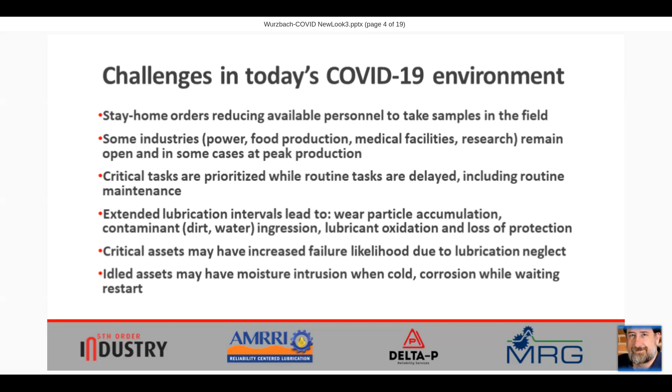We might see corrosion taking place while these components are awaiting restart. We may have components that in the past, while idled, would be cycled or manually rotated, or have lubricant added to them. Because of prioritization of tasks, that might not be happening right now. So all this comes together and creates a really challenging situation going forward.

So what is this sample to central lab model? If I turn back the clock on my work history, I was hired right out of school to build an oil analysis laboratory inside of a power plant. I was given boxes of equipment, quite advanced lab equipment too, including analytical ferrography and other instruments. I built that laboratory solely for analyzing samples from that one facility. Back in the 1980s and maybe early 1990s, large asset owners would have their own laboratories to do analysis, or they might leverage laboratories they had for other purposes like water chemistry or cement analysis, and utilize some of that to do their own lubricant analysis.

But we saw over time a transition to central labs to take advantage of efficiencies, to have asset managers focus on their core competencies. It might not have been thought that lubricant analysis would be one of those core competencies. Central labs also allowed taking advantage of data agglomeration. When I was running a laboratory for one facility, my entire database and history was about a very finite number of components. With a central lab model, that lab has the opportunity to integrate data from multiple sources, start to see data patterns, and use that in a positive manner to help understand what's going on.

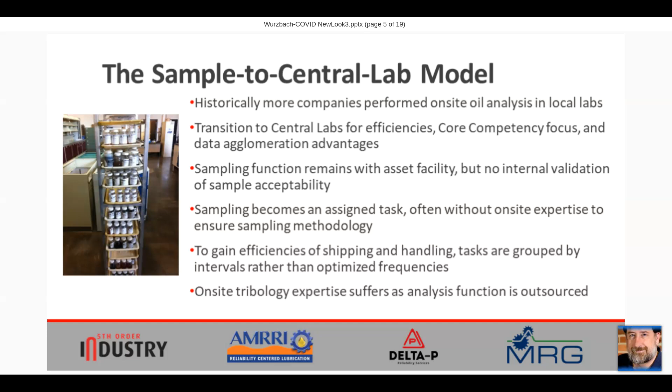Overall, what we end up with is on-site tribology expertise - the overall knowledge of that whole process from sampling and analysis - suffering as the function gets outsourced in many cases.

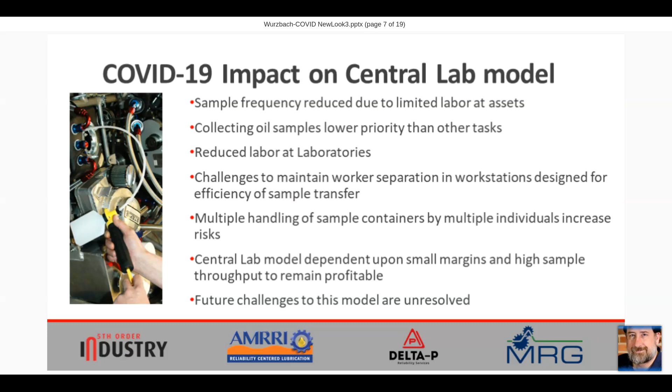The central lab model typically depends on very small margins and very high sample throughput to remain profitable. The future challenges presented by COVID-19 that I've just listed to this model are at this time unresolved. We don't know when this will end - there's talk about it subsiding, but maybe coming back again. And if it's not this particular infectious disease, might there be others? We may see general changes in how we perform work, how we exist as a society, how we interact with each other, and that may have a direct impact on how we've set up systems to analyze laboratories in the central lab model.

Future projections for the economy post-COVID. This is a very rapidly changing situation, and folks are anxious to know what's going to happen next. There was a Forbes article from April 10th that I reviewed, entitled 'Expect More Jobs and More Automation in the Post-COVID-19 Economy.'

You see automation used for a number of reasons, but one can be to minimize worker interface for not just COVID, but all communicable diseases. This article talked about that being a push going forward.

You also hear about wanting an interchangeability of individuals, less specialization, because if that specialized person is ill or not available for an extended period, how does that impact our process? So we want to have a second person up, a third person up. We want cross training and not rely on breaks in our expertise chain by depending on one individual here, another individual there for specialized tasks and knowledge reviews.

There are three key factors outlined in this forward-looking article: automation, education, and the prosperity of human workers. This is achieved through a skilled workforce partnered with automation - they're not mutually exclusive. A lot of times we think about robots and automation as job killers, but not necessarily; they can actually be job creators, job enhancers.

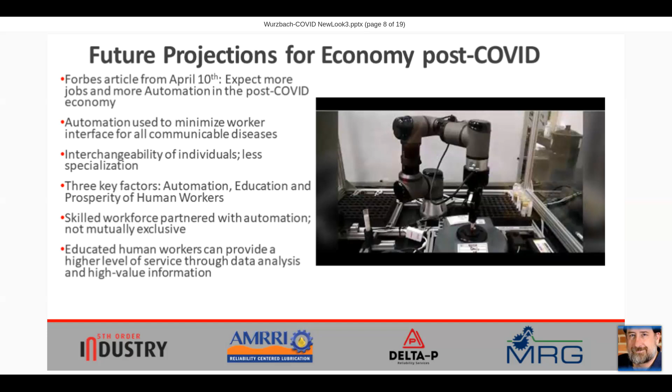I do have a picture here of some automation we've developed in our facility. This uses a 6-axis robot that we call the Grease Monkey. I'm going to bring up a YouTube video that shows this in action.

So the samples in this case are grease samples. They're coming in a standard format with a barcode label. Any of the writing on there is really irrelevant to the robot - it's just looking for the particular barcode to be scanned.

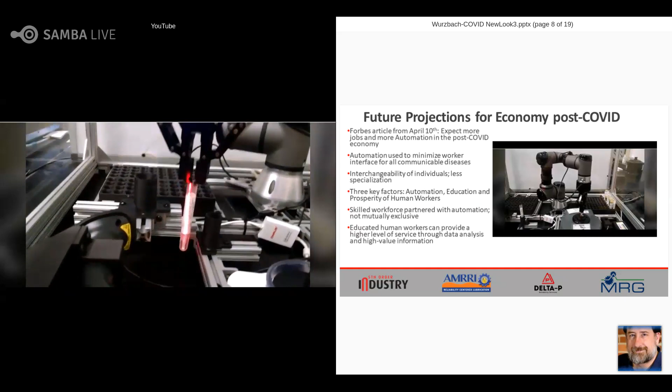There's that confirmation. The robot then takes the container, empties out the sample, returns the container because we're going to need that back when we're done, and now goes through a series of tests.

We can start by weighing the sample, which gives us a sense of the total amount of sample that has been provided. We have a ferrous, an induction coil type sensor, which measures the ferrous content of the sample, and then a colorimeter, which compares the color, in this case of this grease, to the new fresh grease.

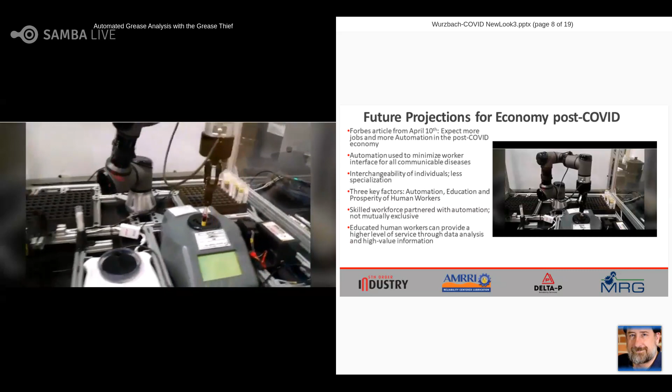When it's done, it's returning that to its original container in the shape that it was submitted and the orientation, so that a robot can pick that up later and do additional tests if required.

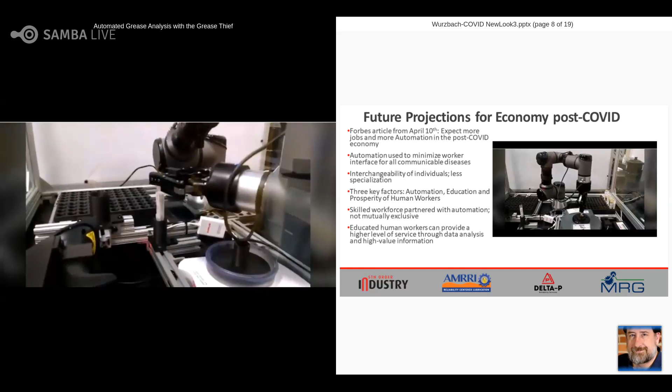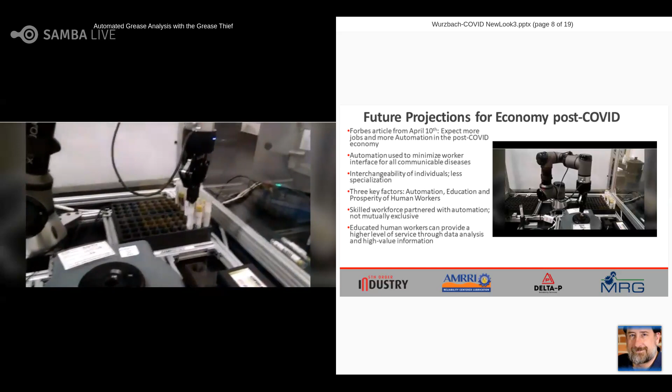This was designed to create an automated process for screening samples, and this allows us to see results autonomously - completely autonomously, being run by this robot, with the data that's being produced being sent directly to the cloud.

By doing so, there's really no human interface at all, except setting up the rack of samples and turning on the robot and letting it do its job.

As we developed this automation for our laboratory, there were really some questions from folks, saying, well, how many samples are you doing in a day? Do you really need to automate that, or can that just be done by an individual basically creating the same tasks? Our take on this was, no, we want automation for other reasons.

Number one is we want repeatability of the process. Secondly, we want to be able to create a low-cost screening process that allows us to look at a large number of samples without a lot of costs associated with it. So an asset owner can screen through those samples and only do the more advanced analysis on those samples that warrant it. And that's what we achieved here.

The added benefit now of having a system like this in a COVID environment is that we can have one person in the laboratory, where we may have had 3 or 4 writing down data, transferring data, evaluating data, and so forth. This data is going straight into the cloud.

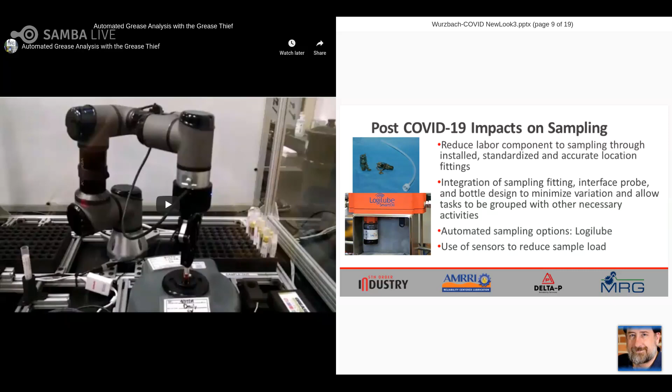Another thing is the use of sensors to reduce the sample load, not only in an automated sampling configuration like this, but in what I'd like to call condition-based oil sampling. Now, we're familiar with hearing condition-based, usually in the context of maintenance, condition-based maintenance, or maybe even condition-based oil changes.

I'm taking it one step further here to say condition-based oil sampling, because really, somewhere, and it depends on the industry and the age of the program, the maturity of the program, and how well the asset and the lubricant are maintained, somewhere between 70 and 90% of most oil samples are determined by the laboratory to be satisfactory. The comments will come back and say, all parameters good, sample at next specified frequency, which certainly guarantees another revenue stream. But basically, what was the value of that analysis to be told there's nothing to see here?

We have resources that are being wasted in sampling labor, in the preparation of those samples and the shipping of those samples, and from the labor being done with the analysis with really no significant finding except, yes, we have a level trend. It really is a level trend from intermittent oil analysis. And that is really low value relative to what a sensor can tell us, because it doesn't reflect time-sensitive changes.

If we have a completely steady state type of operation, and the loading and other variables that affect lubricant condition and the rate of wear creation never change, then periodic oil sampling does a pretty good job at telling the story. But for components where that varies, like in wind turbines, where the wind is blowing one day, the next it's not, then it's blowing harder, it's coming from a different angle, it's putting different forces on the bearings and the gearboxes.

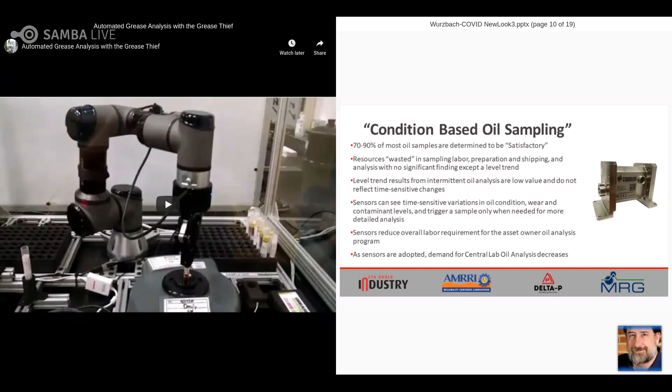So what is the impact, and really what are the options? Because I painted a pretty grim picture for oil analysis labs like the one that I work in. We're going to see reduced samples and higher costs, and that's going to challenge this current model for high throughput oil analysis laboratories, especially now during this COVID period. I'm sure a lot of labs are looking at this right now and saying, when is this going to end, and what is the impact going to be to our operations?

The rise of sensors can put further strain on laboratories. And unlike the COVID-19 limitations, even after we get back to something resembling normal, or at least have a greater movement of labor and contribution, the sensors are going to be a permanent reduction in sample flow to the laboratories.

So really, the options for oil analysis laboratories are differentiation and diversification. It's going to be necessary to differentiate your product offerings and diversify to compete and thrive. It's no longer going to be enough to outbid the other oil analysis labs by a few pennies per sample, because all of these pressures in rising costs, lowering oil sample flow numbers are all going to be working against that model. So it makes sense then for these laboratories to expand beyond oil analysis into fluids analysis and include things like fuels, greases, and coolants in what they offer.

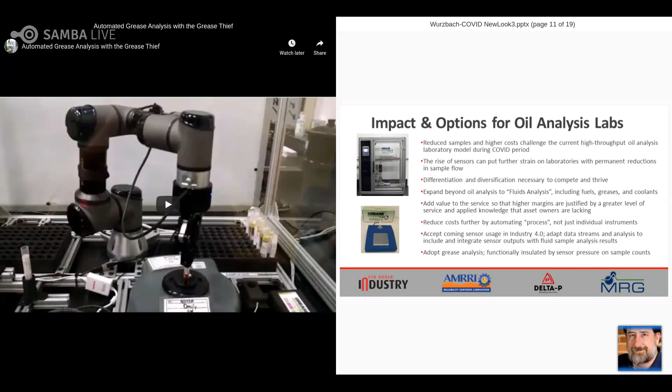Most of the laboratory equipment can be utilized for grease analysis once we are able to handle the sample. But the first piece about grease analysis goes back to, once again, to sampling.

Fortunately, there is a standard and proven solution for grease analysis, and that's the grease thief. It allows installation in certain types of equipment in place of drain plugs, where it can maintain a purge function as new grease is added, and allow the excess grease to drain out of the sampler, with the most recent grease leaving the machine to be what comprises the sample.

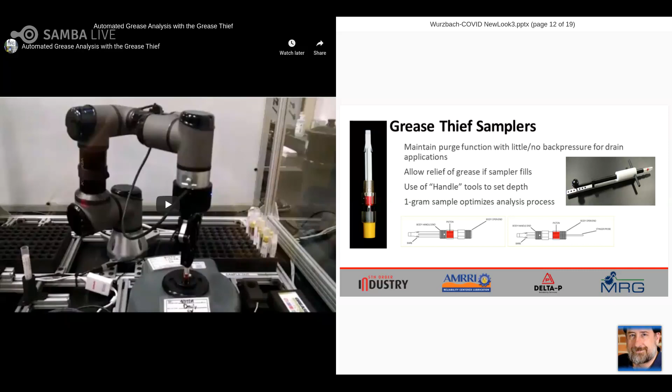It can be used in a tool to be inserted into a machine to take a more active sample, either in a preset depth kind of coring sampling that I talked about a few weeks ago, or with a stinger probe that allows us to kind of fly blind, if you will, and insert until we mate up to an opposing surface, and then again core that sample so that we get that representative sample from the live zone.

Once we have established that sampling program, and the asset owner is able to take that sample, then it can be analyzed. One of the limitations on greasing is the typical small sample size that is available. The grease thief that I just showed, and the methods outlined in ASTM D7918, produce about a 1 gram sample. It's not a lot of grease, and it's certainly not something that can be easily transitioned into existing oil analysis techniques and instruments.

Grease is sticky. It sticks to itself. It sticks to containers and surfaces. And fortunately, we do have a method, a series of tests that can be used for grease specifically, and in the sampling container that's provided.

So the first thing is dropping that grease sample right into an induction coil for analysis, doing a die extrusion, looking at the color that's there, looking at the antioxidants. And again, a lot of the instruments that you see here are the kind of instruments that oil analysis laboratories already have, and they're waiting just to be transitioned into grease.

As the sensors come along and have that downward pressure on demand for oil analysis, the grease analysis can step up and fill that void with the same skilled technicians, some of the same instruments, and use the knowledge that's there to help customers on the grease end of things.

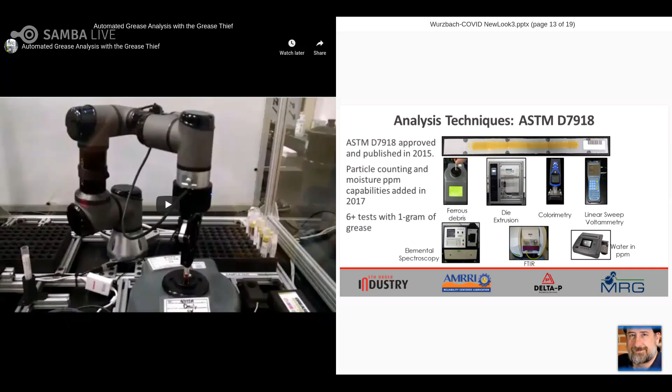So with COVID-19, the question becomes, what is the near-term impact on asset performance? With the current shutdowns that we have in certain industries, other industries will continue to operate, but the assets that are in extended shutdowns waiting for the COVID restrictions to ease, starting those assets is going to be problematic.

It's going to result in increased failures due to lubricant condition, contamination, corrosion that's taking place, because it's unlikely that folks are taking the time to go around and jog equipment to replenish the lubricant, to make sure that the head spaces are being splashed with lubricant so that they don't get corrosion, to move bearings that might vibrate a little due to plant vibration and ambient, maybe from an adjacent machine, to move them around so that you don't get false Brinelling. A lot of that is going to be neglected.

And once we start these assets back up, there's going to be a surge in failures. Some of that's going to be due to lubricant condition and contamination.

The assets that are still out there being utilized, they're also, in a certain way, in many cases, being neglected due to low labor availability. You've got folks adapting to worker separation requirements. So if you've got a component where normally, two people lift that component onto a cart and move it from point A to point B, now you can't put people working that close together.

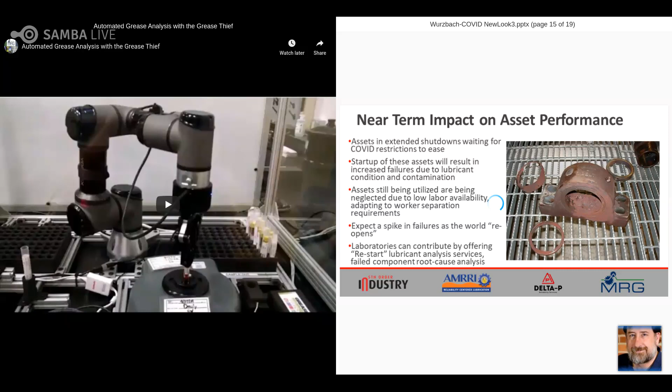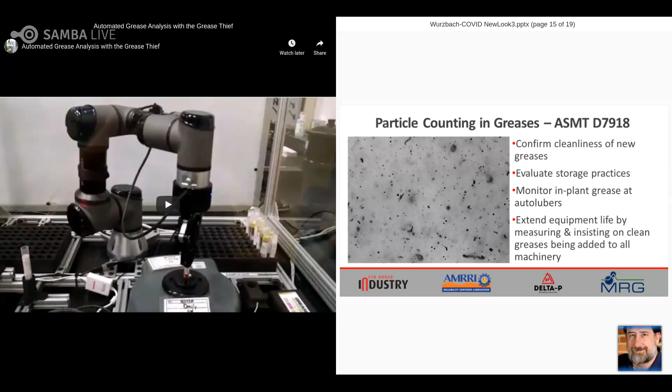Another thing we talked about with the shutdown is the accumulation of contaminants. A couple weeks ago, I talked about particle counting in greases, how that's now part of the D7918 standard, and we can confirm the cleanliness of new greases. This could be greases that have been sitting in a grease gun for months, greases stored in a processing or storage facility, maybe in transfer containers, and oils as well. I think we understand particle counting in oils real well. I just wanted to mention this for grease so we can monitor these areas as part of this return to service.

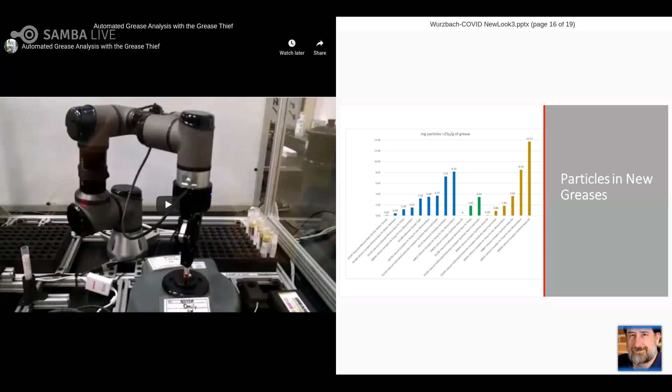I've been sharing some information about new greases, and I think we want to look at this in the context of standby grease. What has happened while the machine was shut down? What happened while our greases have been sitting for months, maybe in not the best protected conditions? Have they gotten dirtier? Have they gotten wetter during this time? Has there been condensation? We can test those for particulate cleanliness and moisture cleanliness, and really try to have a positive impact on the failure rate of the newly started up components.

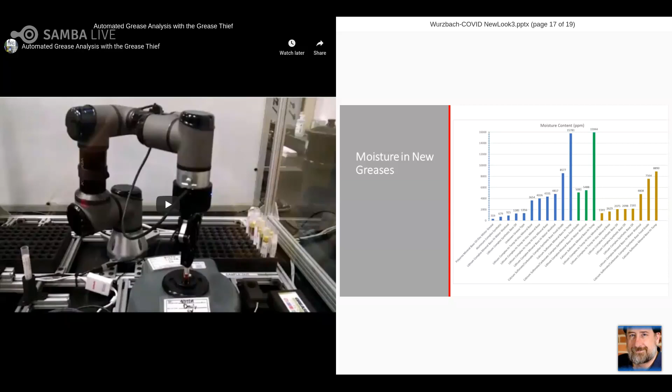I think laboratories can no longer sit back and say whatever lubricant sample happens to come through the door, we'll collect your money and give you results. That's just not a good use of resources for those customers, and satisfaction won't be good if the results don't correlate to what happens in the field. It becomes important for laboratories to reach into that sampling process, to provide guidance, the right kind of equipment, training and oversight, and to give direct feedback when sampling is suspected to be inadequate, so that folks can lean on their laboratory for help in that regard.

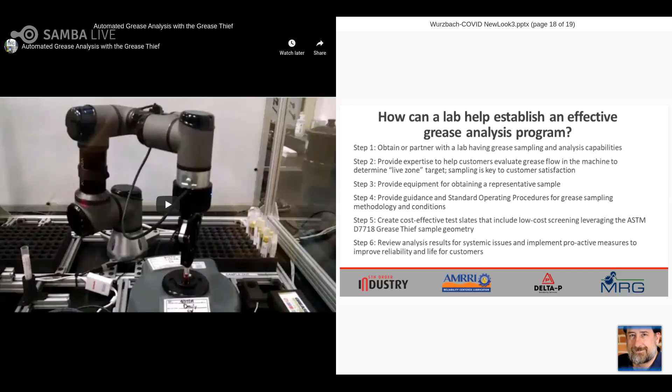So instead of just saying there's a high particle count in this particular sample, the recommendation can be: let's go back and take a sample of the grease supply and oil supply as a follow-up, and see if it's your supply that's the particulate or moisture problem, or whether it's getting in while it's in the machine because of shielding issues. This is where great value is there for customers, and the laboratory can start to play a wider role in helping them get to that point.

So what's the world look like post-COVID? How are we going to be managing fluids? The fluid analysis model in this environment must include value-contributing activities for remote workers.

What do I mean by that? Well, not everybody is going to come to the same location and work side by side or be able to walk down the equipment. We need to think about delivering data in a format that is of value to those folks who may be spending some portion of their workday remotely at home, separated either because of another outbreak like COVID-19, or just changing policies companies might have to have more people work remotely, to minimize infectious diseases in general as a way of business to mitigate risk going forward.

That means we're going to have universal access to fluid analysis databases, for the lab but also for the asset owners. No longer can asset owners just wait for someone to manually put together a report and email it, and then that email gets forwarded. Universal access, where folks can log in and see their data in real time, is really going to be critical, and is certainly a first step in helping to integrate real-time sensor data with the discrete, periodic sampling analysis results.